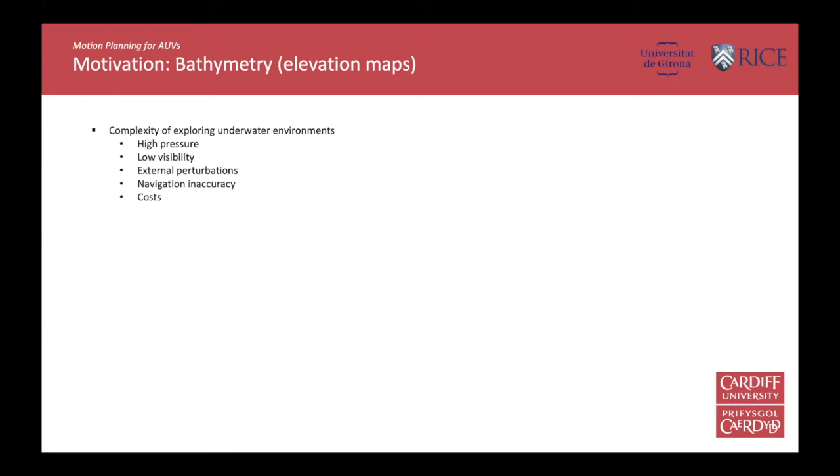Underwater robotics is a really expensive field. The missions are pretty expensive—a small boat with 4 people and 1 day of mission could cost more than 500 euros to justify it, at least on the Spain coast.

So basically what we want to do with underwater research is create bathymetries, or maps of the sea bottom. For that, you normally have one of these multi-beam sensors that maps the sea bottom.

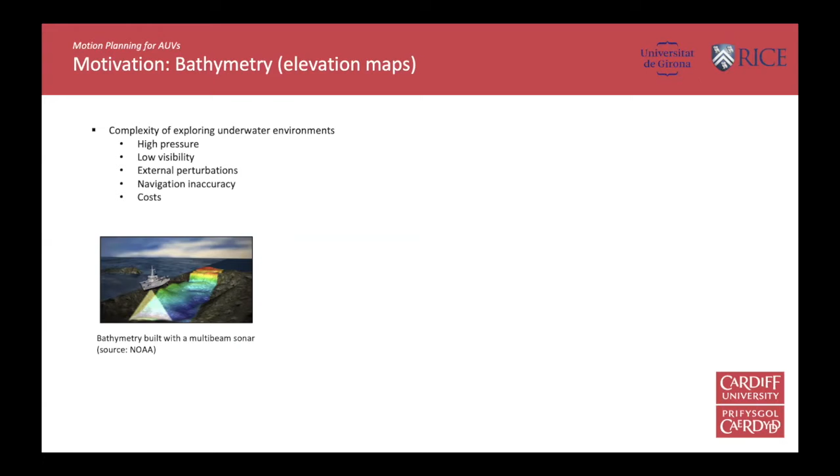But because of advances in sensors and actuators, and especially the increase in computing power, in recent years we've been able to start using what we call AUVs, or autonomous underwater vehicles, better called underwater drones. These are autonomous vehicles that allow an autonomous system to map the environment and create high resolution maps of the sea bottom.

So the main motivation when I started my PhD—and it's still an area of research in Girona and many other labs in the world—is how to make the vehicles smarter so that we don't have to navigate at a pre-established altitude.

Because when you are navigating at a safe altitude, you basically lose part of the details since you are too far from the objects you are trying to explore.

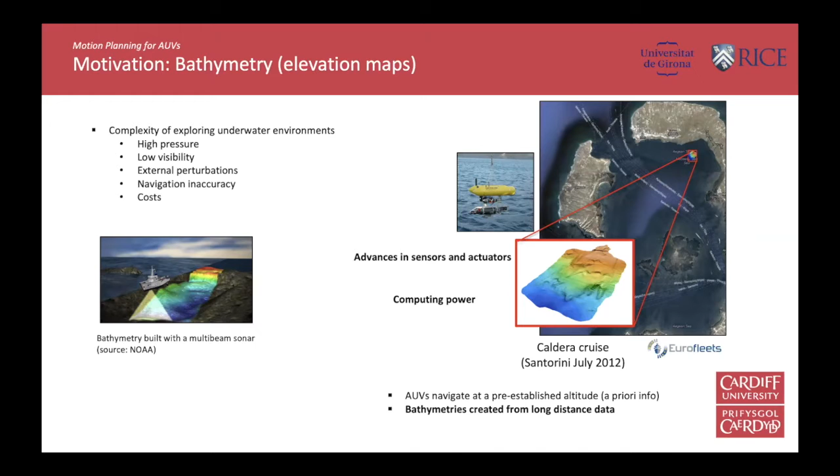So the main objective I had during my PhD was to endow autonomous underwater vehicles with the capability to incrementally map the environment, assuming the environment was unexplored, and to be able to plan online three-dimensional paths that have to be safe and feasible according to the motion constraints. I'll explain more details about these particular parts.

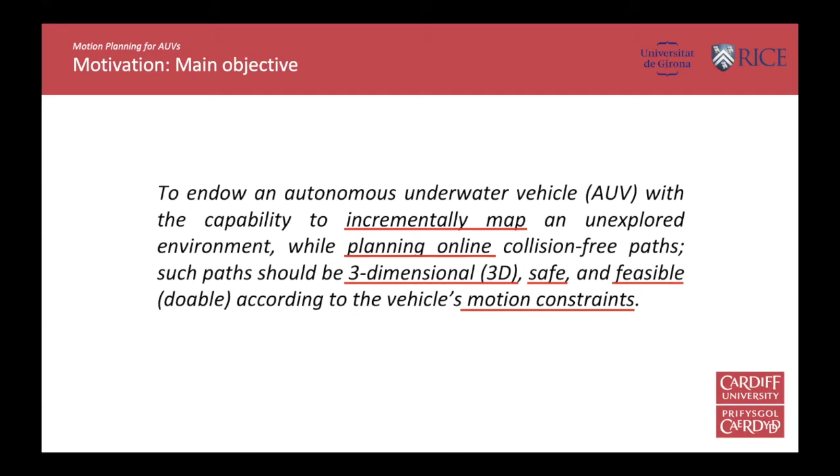Basically, motion planning is a problem that consists in defining a method that will find a connection between a start configuration and a goal configuration within the configuration space of a vehicle or robot in general. There are different approaches to solve this problem, but I particularly focus on something called sampling-based methods.

One of the most famous sampling-based methods is the probabilistic roadmap, proposed by Professor Lydia Kavraki back in '96. Instead of having an explicit representation of the configuration space, we generate random samples of the configuration space, then use a graph to connect those samples and find a connection between a given start configuration and a goal configuration.

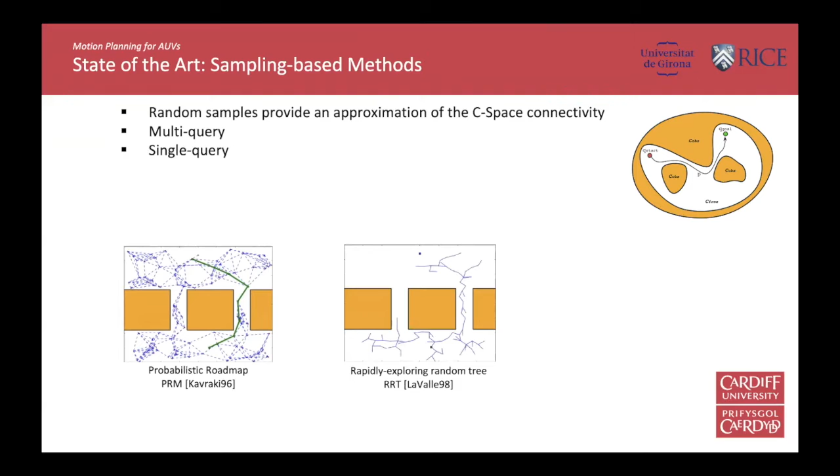A similar method, instead of creating a graph, was proposed by Stephen LaValle using trees—this method is called RRT. It's also a really famous method, and it's similar: we generate random samples in the configuration space, then extend the tree so that we manage to connect a start configuration to a goal configuration.

More recently, in 2011, Sertac Karaman proposed RRT* and PRM*, which are basically variants of the basic methods in which if you let the algorithm keep running, you get a better quality solution. Instead of having random solutions, you get something close to optimal.

As you can imagine, for these methods, collision checking is really critical, because for each sample you generate in the configuration space and for each connection you want to make within the graph or tree, you need to do collision checking to verify that those samples or connections are valid.

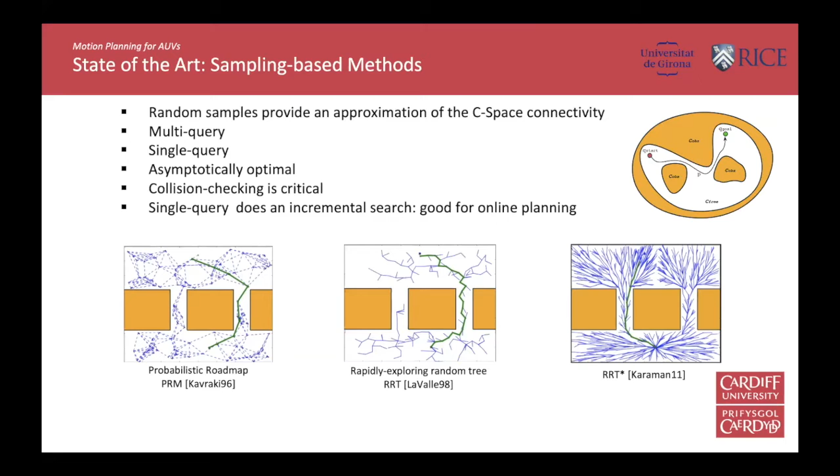Single query methods defined with trees are basically the best used for navigation. They are really good for online planning, and I will show why. Coming back to the main objective, we wanted to plan feasible paths, safe paths, and they have to be incrementally mapped and planned online.

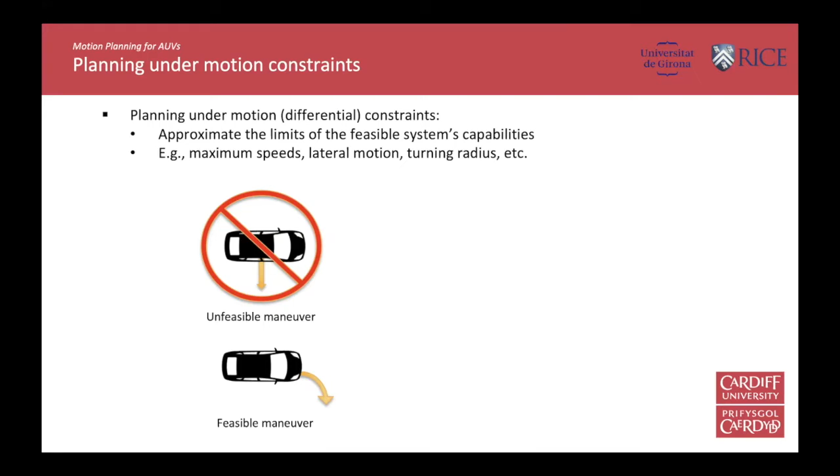Let's start with feasible and what feasible means. You've probably heard about the non-holonomic constraints of a vehicle, and the easiest example to understand this concept is a car. A car cannot move laterally. It can only move in a constrained way, you need to combine motion laterally and forward and backward. You cannot just move purely laterally.

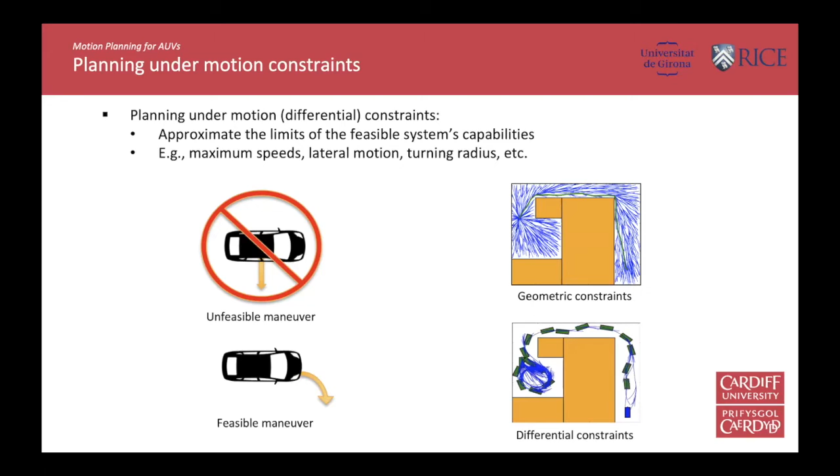An example of that is the RRT also solving a problem, assuming you have a car starting from the green configuration and you need to get to the blue configuration. In order to get out of this situation, you need to turn around and then go to the goal destination. And why is this important?

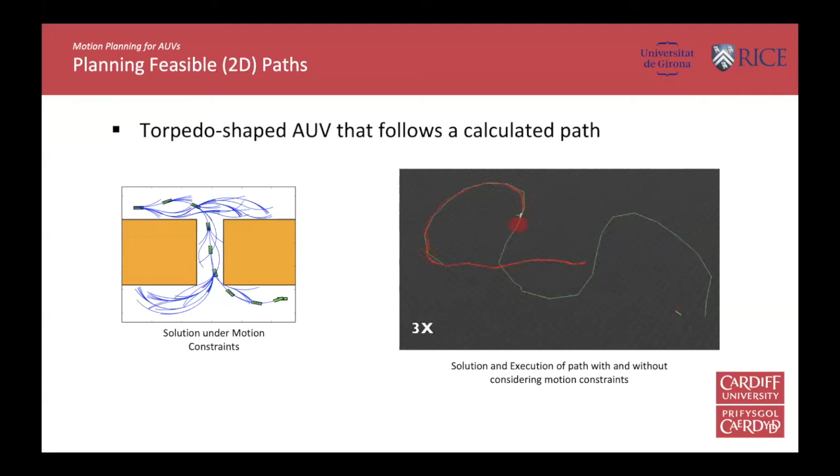Well, unfortunately, I learned this the hard way. This is an experiment we did in Girona with the vehicle navigating and following a mission that does not consider the non-holonomic constraints of the vehicle. The main issue is that if you don't consider the constraints of the vehicle and ask it to follow a path that doesn't account for those constraints...

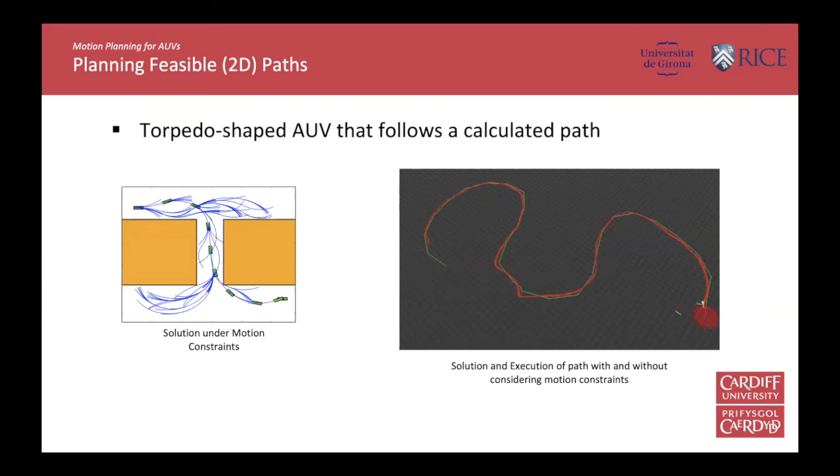...then the vehicle will probably have a behavior that is not expected, and that could be dangerous, because when you ask the vehicle to follow something that is not feasible, it will just deviate from the planned trajectory and you may hit obstacles you didn't consider when planning the path. That's why planning under motion constraints is really important, to know that the path you are generating is actually feasible.

So how can we do that? How can we plan using sampling-based methods to use motion constraints? Well, it's more or less simple. It's basically that you have a differential equation that represents the motion constraints of the vehicle.

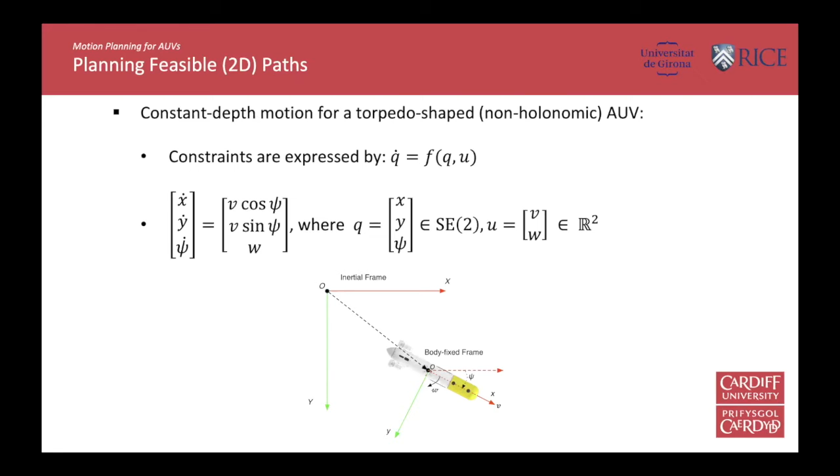In this particular case, we can approximate the torpedo-shaped vehicle to have a unicycle equation, so it's basically similar to a bicycle model. And with that equation, you can use it to extend the tree and create new configurations to connect.

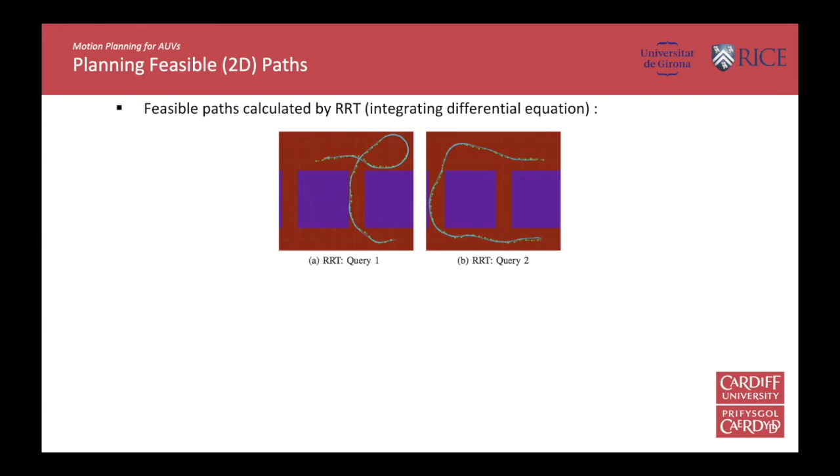But then one of the questions is that, of course, the first two pictures on top are valid, meaning they are feasible for the vehicle, but they are extremely inefficient, because I was using a basic RRT algorithm that was just planning randomly and trying to connect the start and goal configuration.

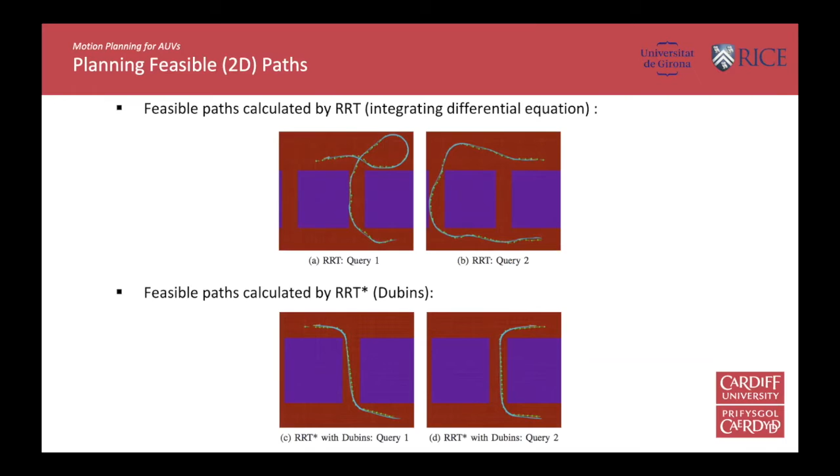But one of the problems with planning these feasible solutions is that they could be unsafe, and I will explain that later. Navigating at a constant altitude or constant depth is not really of interest for an underwater vehicle, because as I said in the beginning, the main objective with the underwater vehicle was to be able to get close to those objects, to those underwater structures.

So we should also consider the vertical motion of the vehicle and not constrain it to navigate on a plane. We can do a simple approximation by interpolating the vertical coordinate of motion of the vehicle, and then extend the configuration space. We initially had a three-dimensional configuration space with X, Y, and psi. We can now have X, Y, and Z to express the vertical motion.

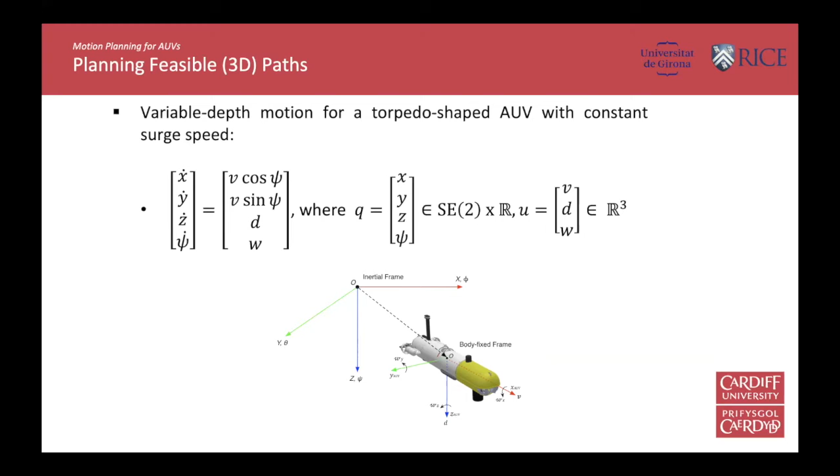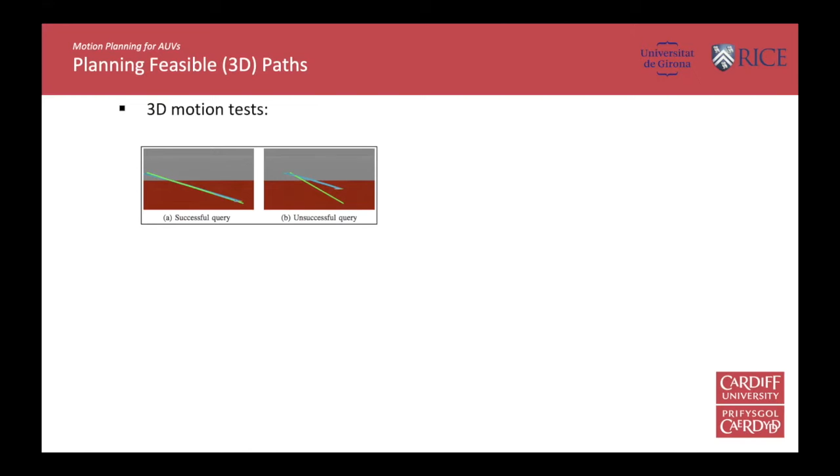So when we get solutions like that, imagine you don't want to use the kinematic or dynamic constraints of the vehicle. What could happen is that you ask the vehicle to dive and go deep too fast, faster than the vehicle can actually do. Then we'll have the situation on the right, an unsuccessful query. The green line is the planned path, and the blue one is the actual followed path.

Instead, if you have the motion constraints in place, what the vehicle will do using a motion planner like this is probably circumnavigate while descending at the same time, so the vehicle can reach the desired depth.

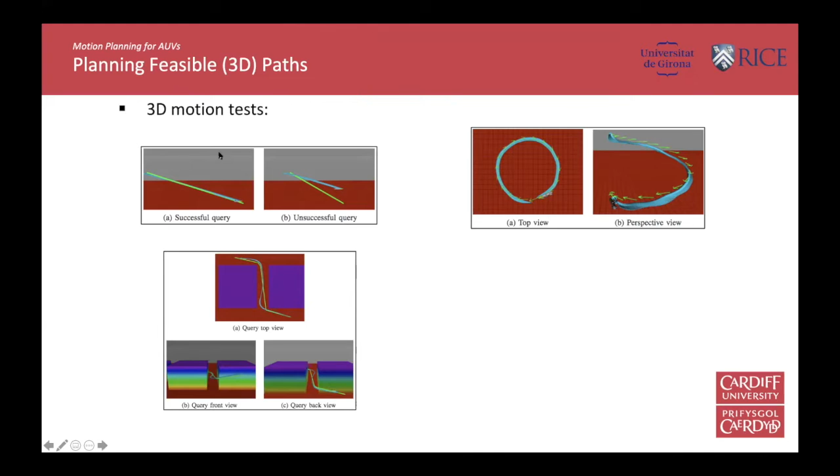And then we have other more critical examples, like if we don't consider the kinematic constraints, as you will also see—I can maybe use a marker here.

You see, for instance, in this part here, how when the vehicle is not considering the motion constraints, it's actually getting too close to the obstacle, the one in purple on the left.

And that can improve, of course, if—what happened to my pointer? There you go. Sorry. Oh, I got trapped here. Okay. Just a second. Okay, now.

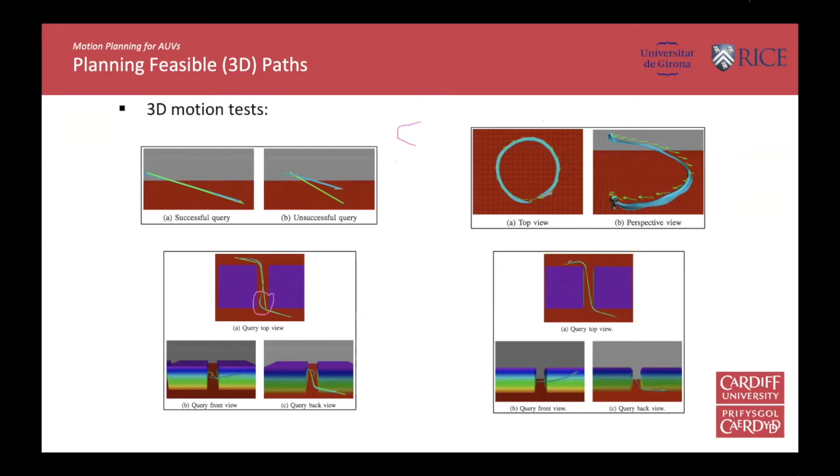So when you consider the motion constraints, you see on the right that we don't have those situations, but we have a different situation when we plan too optimal a path: basically, we get too close to the obstacles.

And that's the next problem that I'm going to explain here. Is there a way that I can just clear?

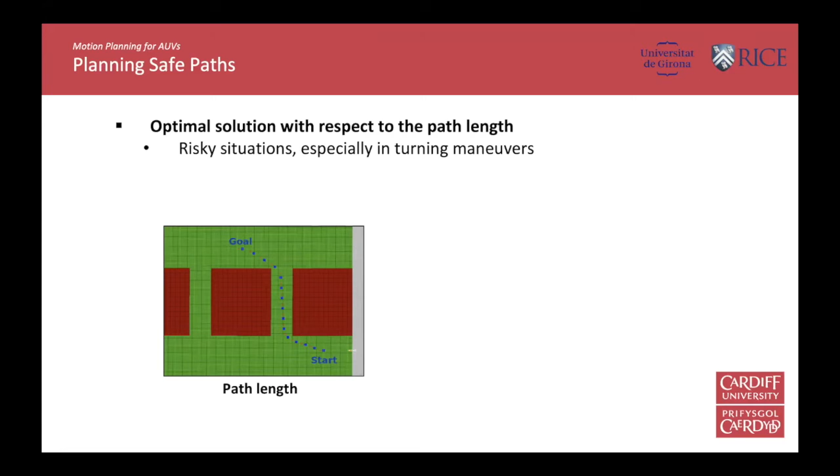Perfect. So basically, we need to guarantee that the paths we are planning are safe. So what is the problem here? When we are considering optimality constrained just to path length, we get too close to the obstacles. So the idea is that we should get a cost function that will take us away from the obstacle, but at the same time try to optimize the path length.

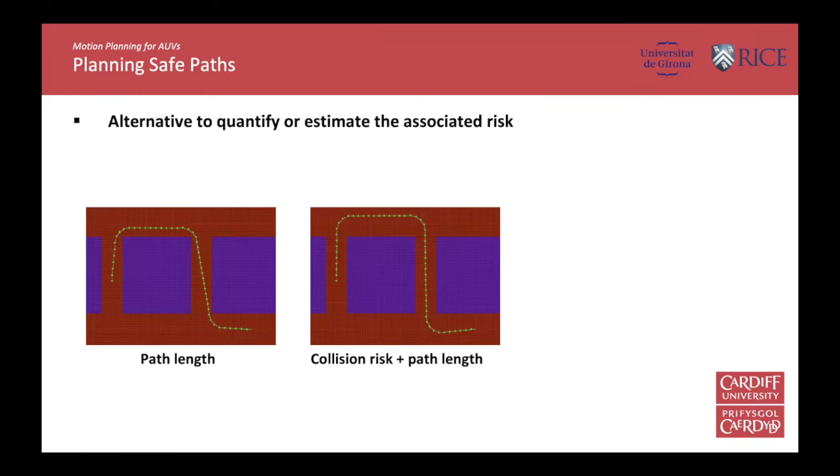So you will see situations like these when you just consider the path length, or situations like this when you combine the risk of collision with the path length. To do that, you can define a simple cost function that integrates the risk of collision with respect to distance, and that combined cost gives you the results on the right.

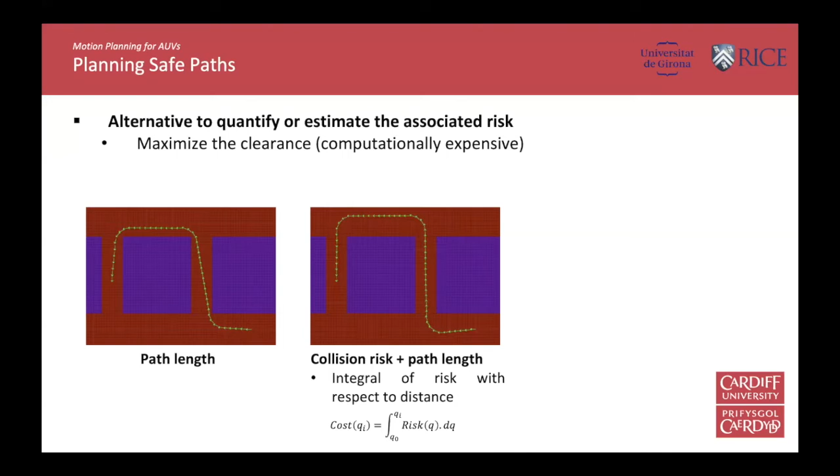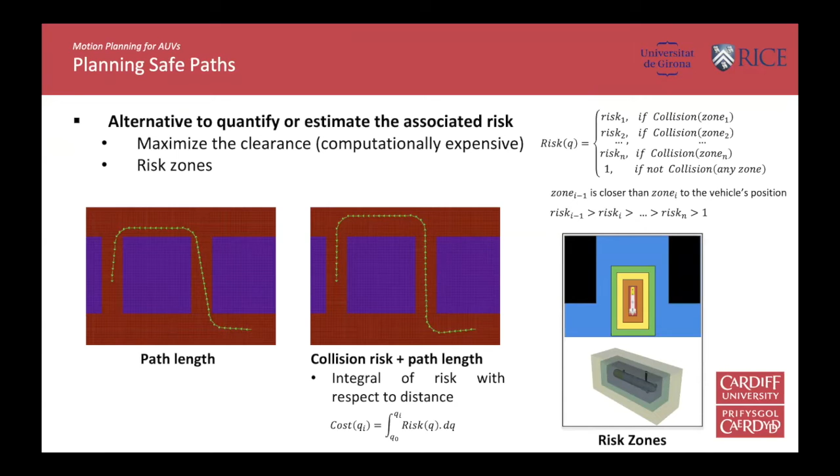In order to do that, we propose something we call risk zones. That is, any time an obstacle hits one of these safety rings or safety zones around the vehicle, we penalize it and increase the risk of collision.

How can we make it online, to be able to map and plan at the same time? This is really critical with underwater vehicles—probably the closest analogy is aerial vehicles—because one of the main issues is limitation in computation power. As opposed to terrestrial vehicles, where we can have multiple computers dedicated, for instance, one to localization, one to mapping, and one to planning.

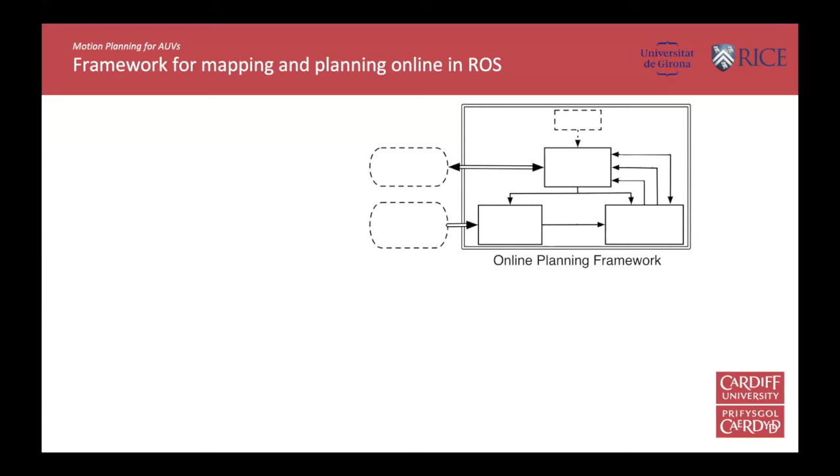In an underwater vehicle, we are normally restricted to at most 2 computers, but normally you just have 1. So one of the challenges I had was to put everything in one computer and make it work. This is something we propose with ROS, defining different functionalities to run on a single computer.

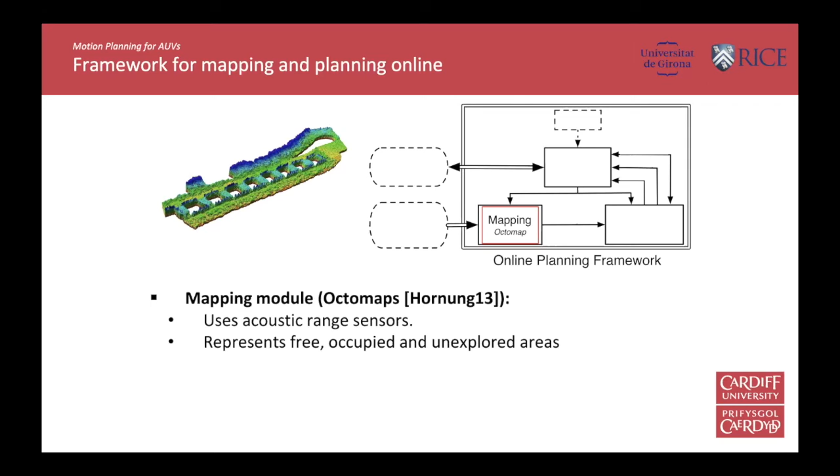So we initially have the mapping module. The mapping module uses Octomaps—a voxel representation, a volumetric representation library that uses voxels to represent the environment. It's an open source library, and it's also available for ROS.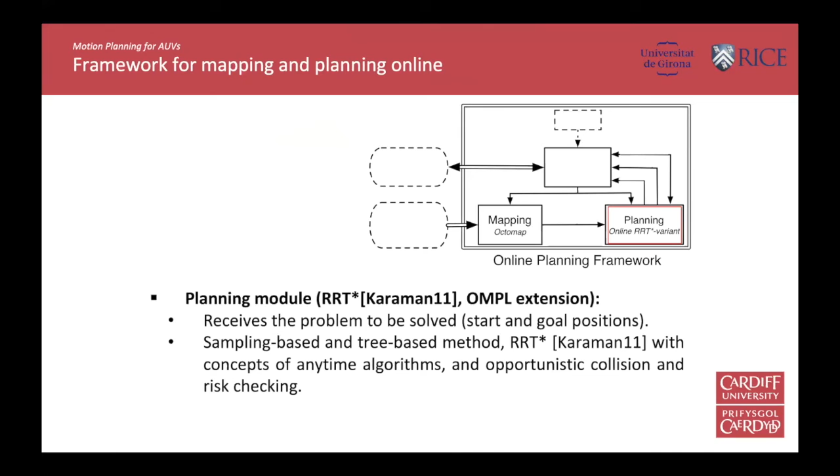And then we extended the RRT star. We have a couple of publications where you can see the details about the extension of the method, that was implemented using the OMPL, the Open Motion Planning Library that is used for these extensions.

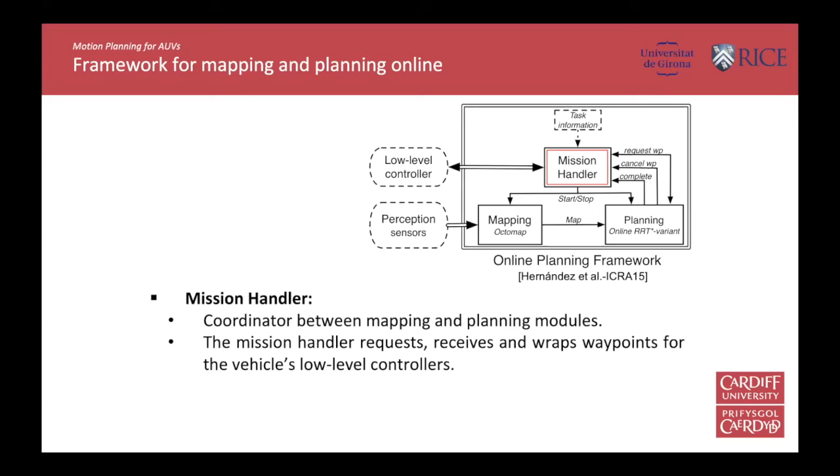And then we have a third node that was the mission handler. The mission handler was basically receiving the high-level commands where the vehicle had to go, and then it coordinated, of course, the mapping module and the planning module.

But I want to go more examples of the results that we got instead of just focusing on the theoretical part. So the first test that we did for this is a breakwater structure that is located in San Feliu de Guixols in Girona.

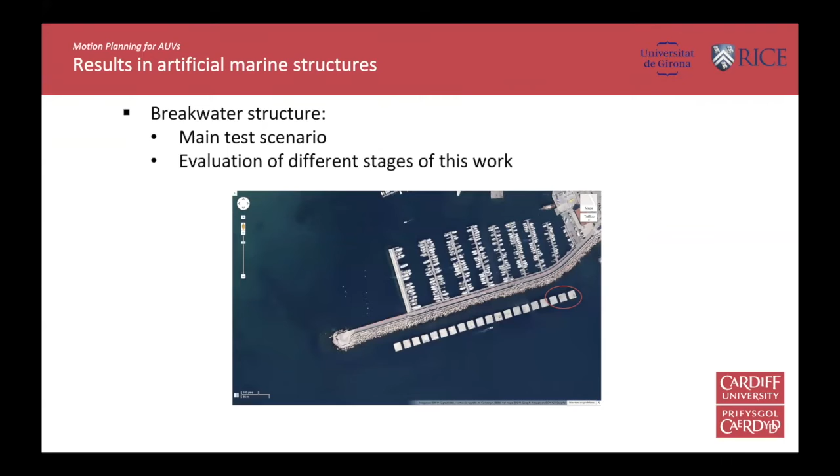And this is the vehicle that we were using. We were using the Sparus 2 AUV, and it was endowed with a profiling sonar and with some echo sounders. This is a work that we presented back in 2016 for IROS.

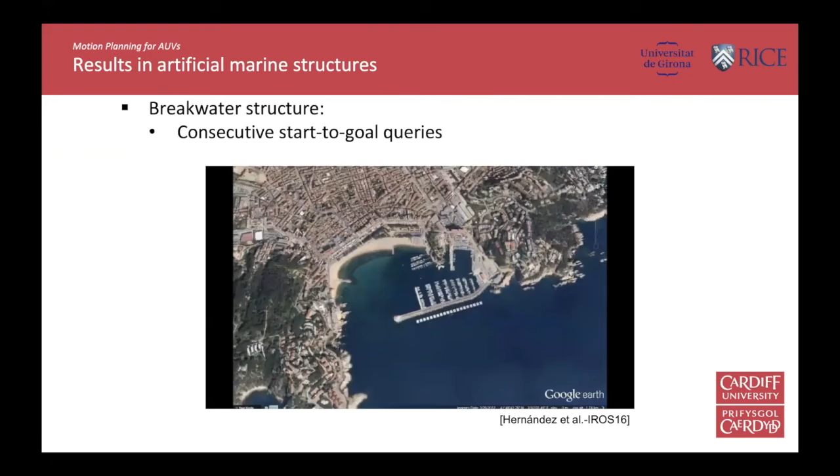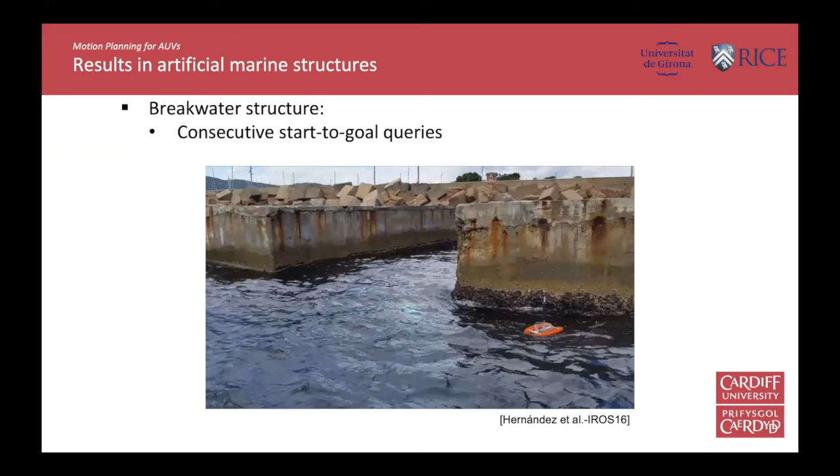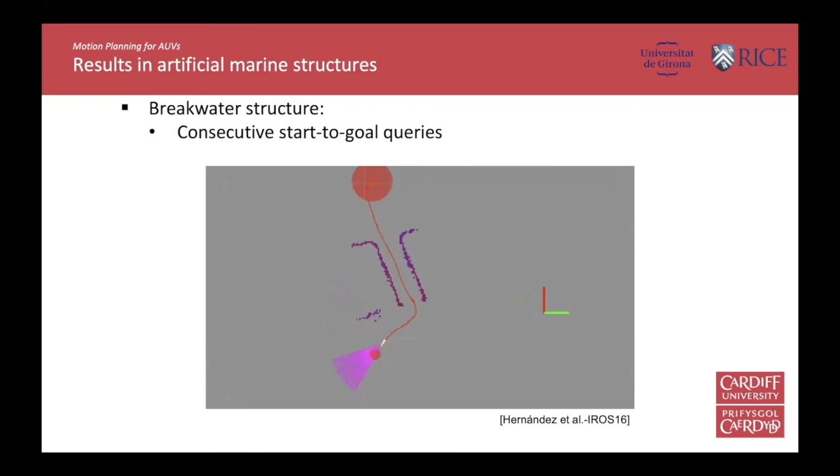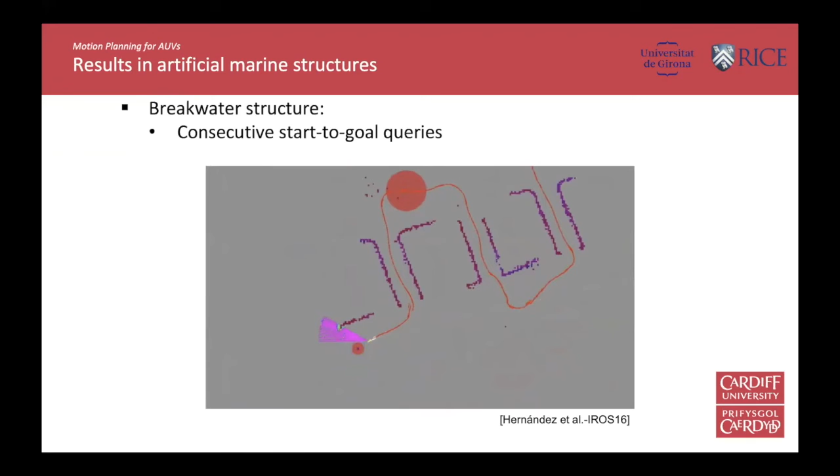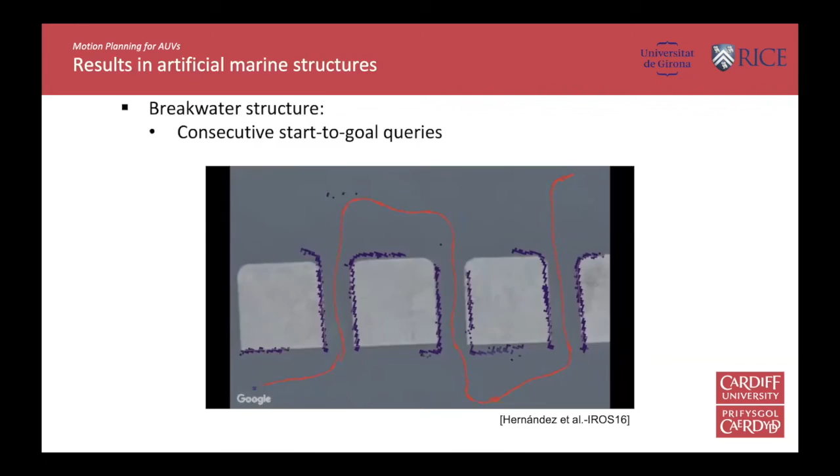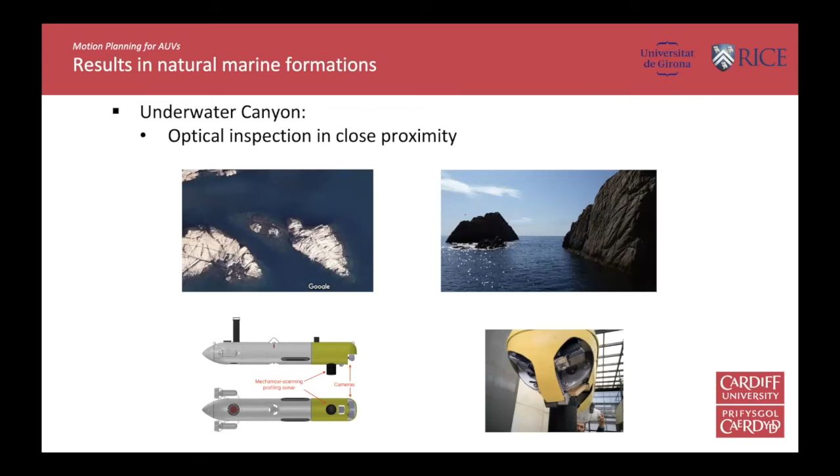Then the second one that I'm going to show is - we initially thought, okay, the breakwater structure is a really good proof of concept, but it's not really what we want to show. We want to show that the vehicle is able to navigate in really complicated and challenging scenarios. And for that, this is another paper that we presented in 2016 in Sensors.

And here is the exploration of an underwater canyon, which is much more complicated because it has not regular shapes, and the vehicle is also more exposed to currents. In this particular case, what you're seeing is that the vehicle is detecting the rocks actually.

And that information that you see, the vehicle didn't have it. The vehicle didn't have a map, it was building the map and it was just trying to go through the canyon. You see that the path is being reshaped, it's adapted, depending on the detections that the vehicle is getting from the scanning sonar that it's using.

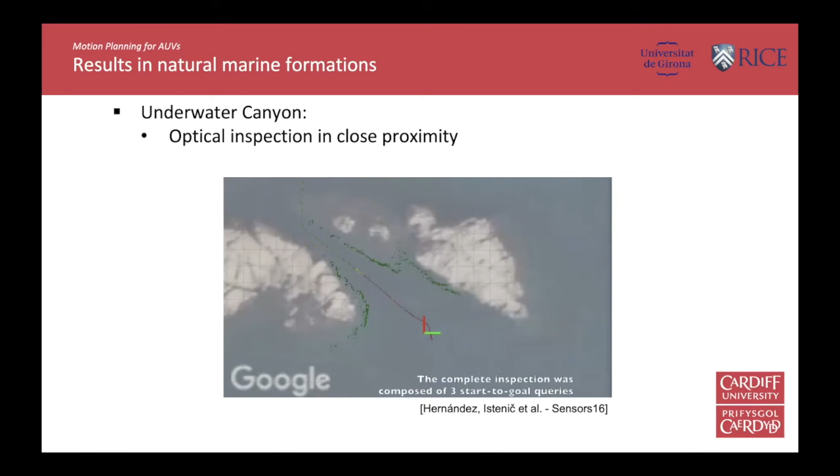And something that was really interesting for us is that because this environment, we didn't know the actual shape. From the boat, it was really different. We realized, because the vehicle was also with 3 GoPro cameras, we actually noticed that the canyon is just getting narrower. So the canyon that we thought in the beginning was more or less 8 meters wide, it was in the end less than 5 meters. It was a really tight canyon for the vehicle to navigate in.

Because of course the vehicle has to be at least 2 or 3 meters deep in order to avoid the wave in the surface. And then once the vehicle was able to complete the mission, we asked the vehicle to go back to the initial position. We asked the vehicle again to go inside the canyon to complete the imaging loop.

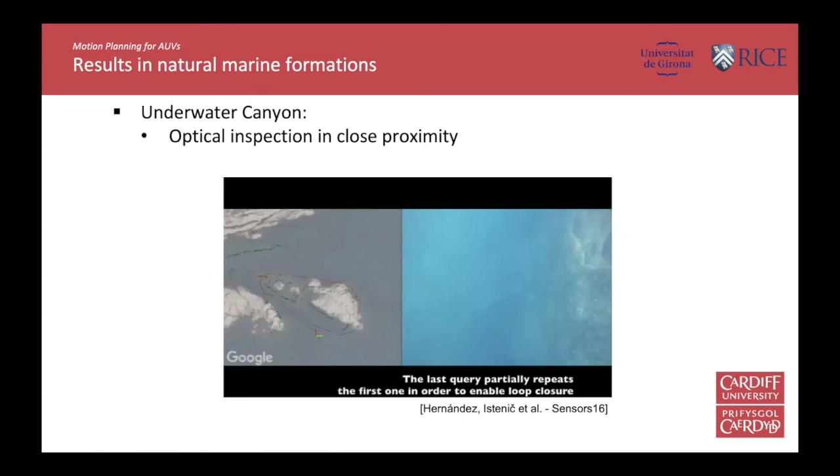And then you will see something that is really incredible. This was a really amazing result that we had back in 2016. Using the 3 GoPro cameras that we had in the vehicle, we were able to basically map and create this 3-dimensional reconstruction of the canyon.

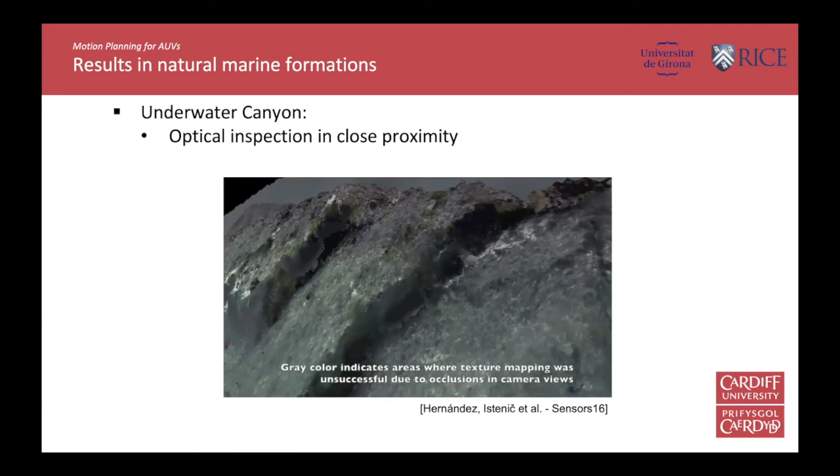And this is what I was telling you before, the canyon is just getting narrower as you go deeper. And this is a really interesting result because this is the way that we proved that the vehicle was able to navigate in an initially unexplored environment, and that we could use these tools that we implemented in ROS, combining mapping and planning modules to explore such challenging environments.

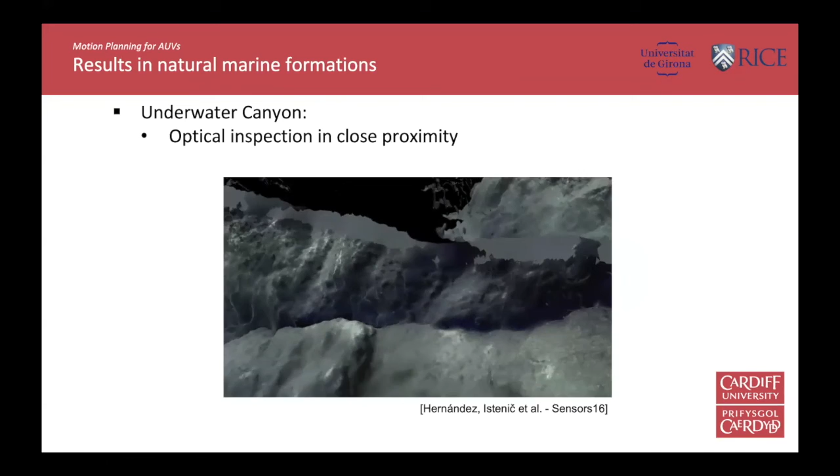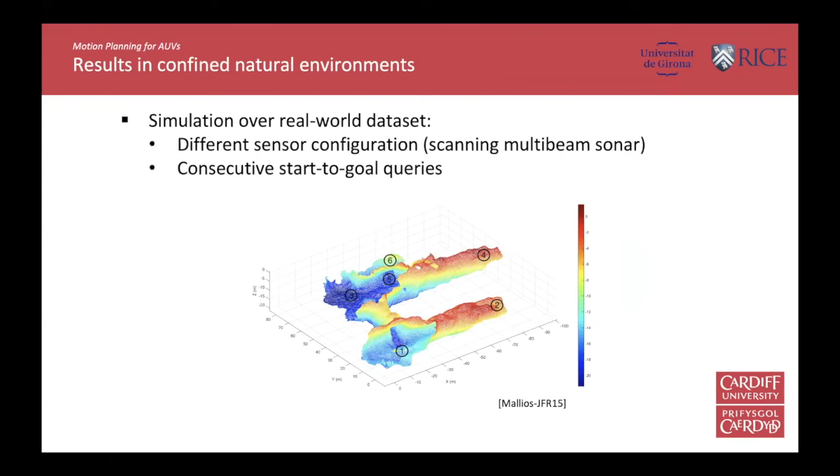After we did this, we also used the vehicle in simulation. This is a project still ongoing in Girona, where they are trying to explore not an underwater canyon, but an underwater cave. We did some preliminary work in another PhD thesis to map this place. When I was finishing my PhD, we published another paper in the Journal of Field Robotics last year.

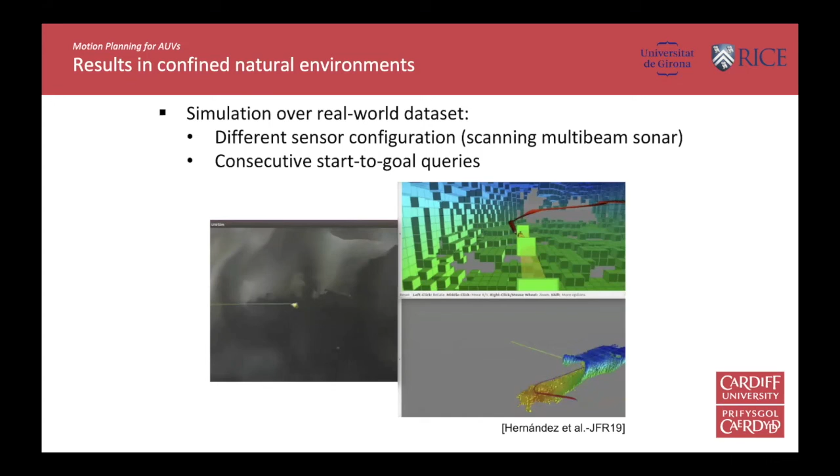This proved that the framework we were proposing was capable of navigating difficult three-dimensional environments. The canyon was navigated at a constant depth, but in the cave example, the vehicle has to use all possible motions, not only lateral but also vertical motions, so it can adapt to the different altitudes or depths of the environment.

Maybe just to wrap up and go to the questions part, this is another interesting application that we implemented in ROS. This was a collaboration with an institute in France called IFREMER, dedicated to ocean research. They have a huge AUV, much bigger than the one I was using in Girona. It's a really expensive one called the AsterX AUV, and they use this for real world applications. This vehicle can go 3,000 meters deep, to actually find shipwrecks or plane wrecks.

The application they described to us in this project is: sometimes you send the vehicle to explore a desired target and try to cover the area, but since you don't know how the area is that you're trying to cover, sometimes the mission isn't enough because you find gaps, or you find a potential target of interest. But then what they have to do is retrieve the vehicle, extract the data, process the data, replan a new mission, and send the vehicle back into the water.

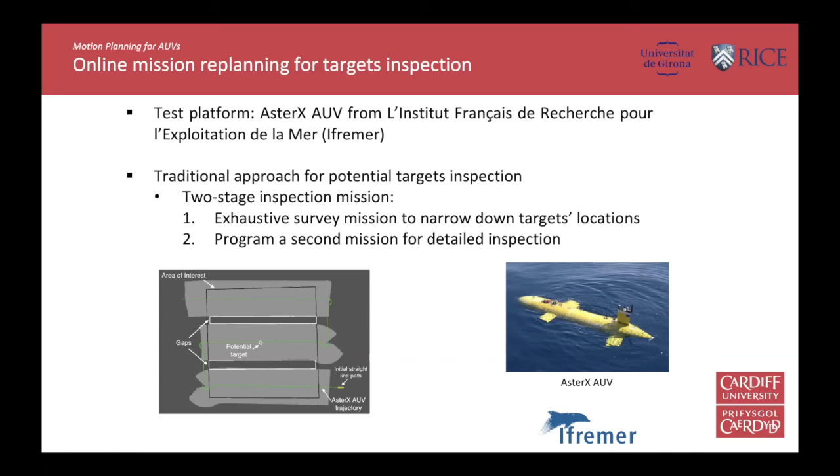Again, this is incredibly expensive, because for this vehicle you don't have a small vessel with 4 people, you have a whole crew working for this vehicle. So it's incredibly expensive. What we propose here is a way to deal with those situations—basically a ROS architecture.

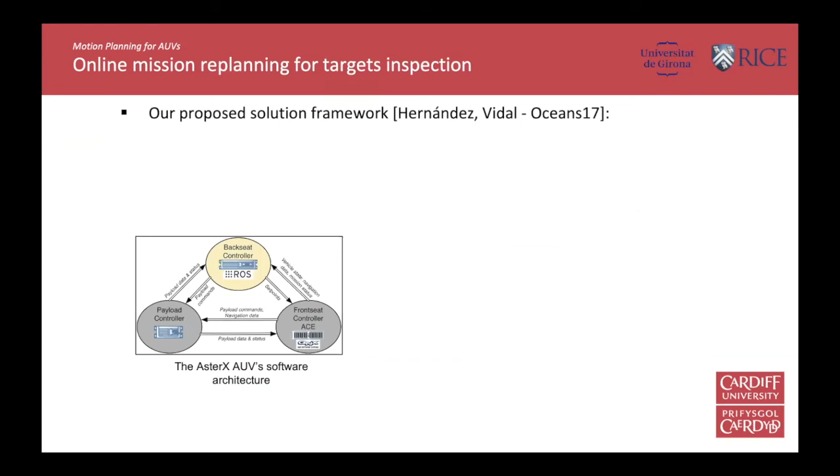In this particular robot, we had 2 different computers. One computer is dedicated to the low-level control of the vehicle and the hardware, including thrusters and sensors. And you have a high-level computer using ROS to do high-level control of the mission. Within that high-level control, we included different functionalities like detecting gaps or targets, a mission handler, a path planner, and a path following controller.

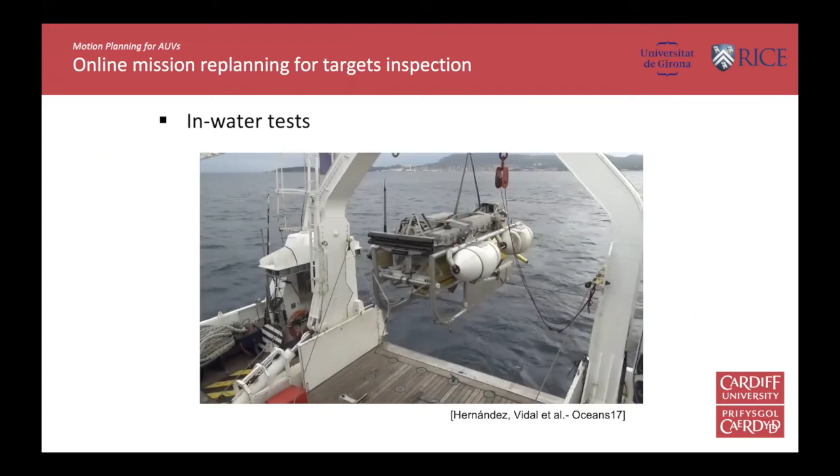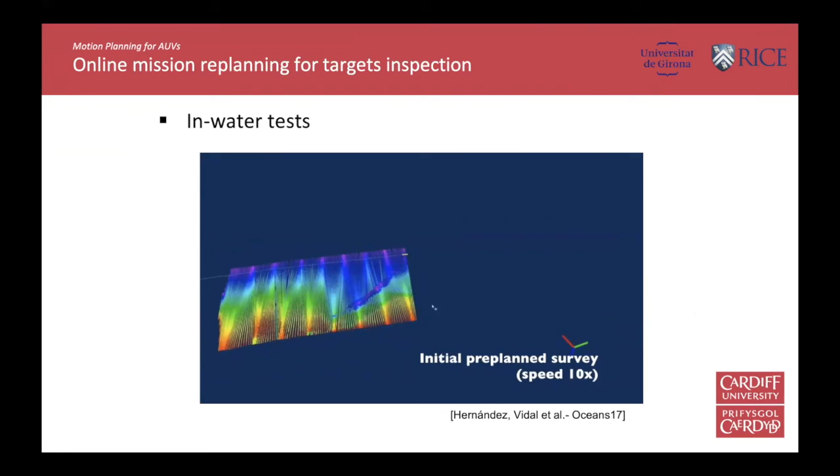This is the last video I'll show today. This is the vehicle—as you can see, it's huge. We're deploying it here. We were exploring an area where we knew there was a plane wreck. This is the vehicle exploring the area, real world data. We intentionally left a couple of gaps in the mission that we defined.

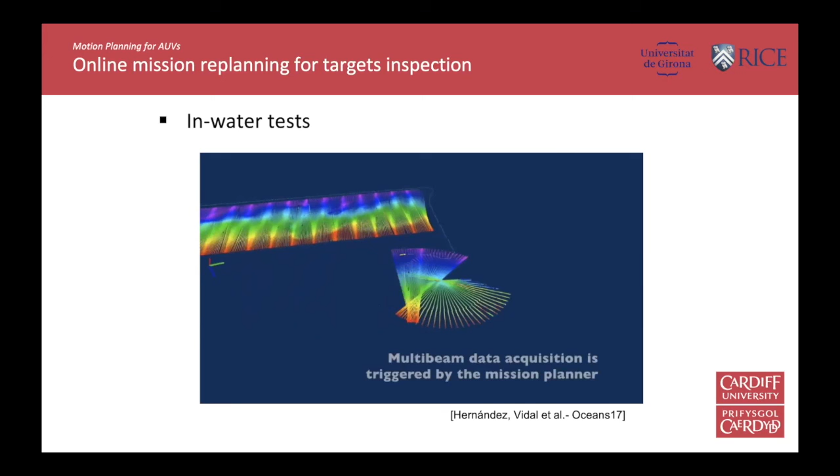This initial part is typically included in any commercial package for these vehicles. The vehicle is here creating the other part of the mission. Now you see a gap between the first part and the second. Here's the second gap. And in this area, which is really difficult to see, there was an object. So we detected the 2 gaps and we also detected the target.

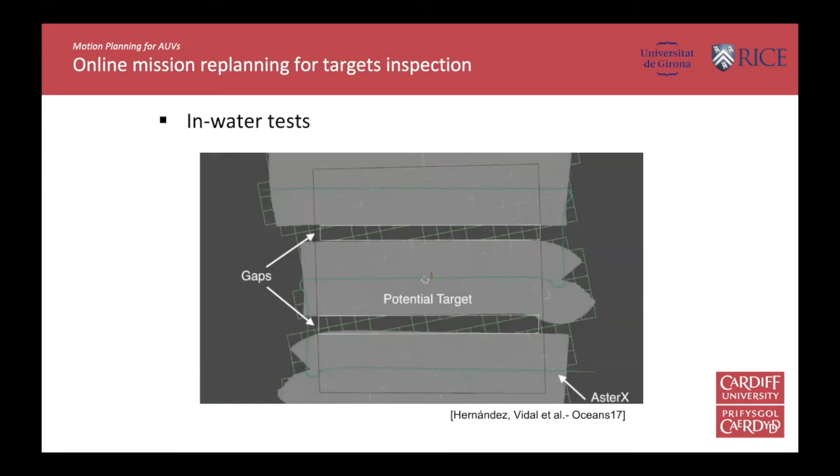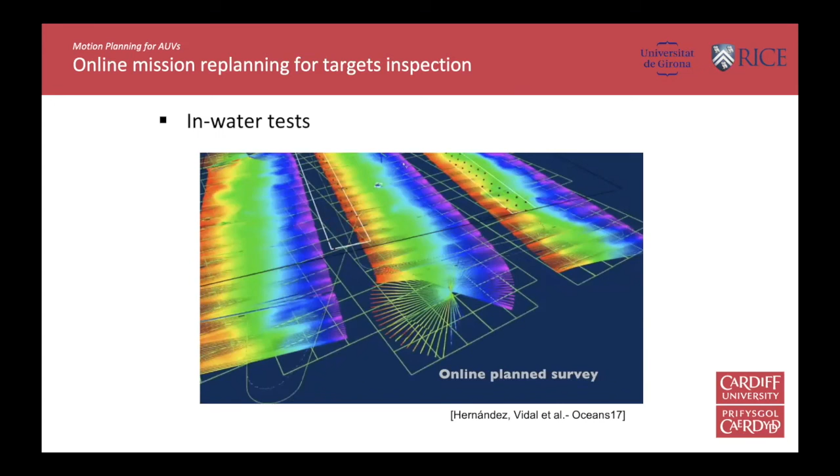But now, instead of just taking the vehicle out of the water, retrieving the data and processing it, we did everything in ROS onboard the vehicle. The vehicle autonomously detected the 2 gaps and the potential target. After completing the initial mission, we took over control of the vehicle and sent it to complete the rest. Now the vehicle is navigating deeper, exploring the potential target—the plane wreck.

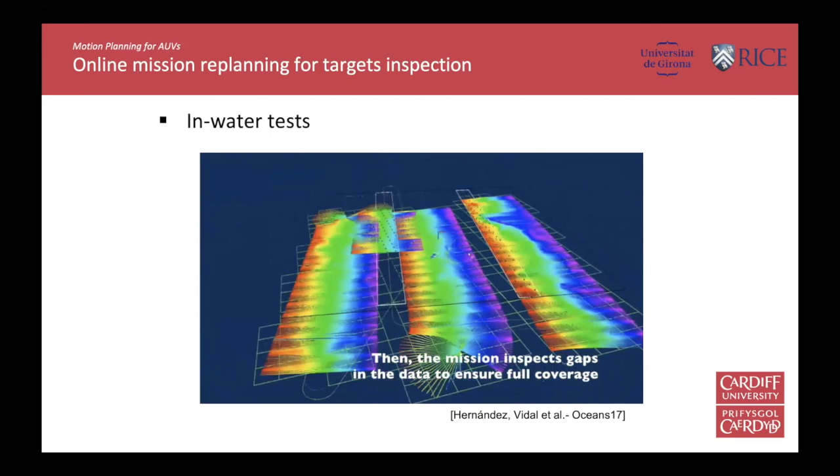After that, the vehicle essentially decides: I still have 2 gaps that I didn't cover in the beginning, I will go and cover those gaps. And if I find something else, like another potential target, I will also go and further explore that potential target. This is another work that we presented at Oceans 2017.